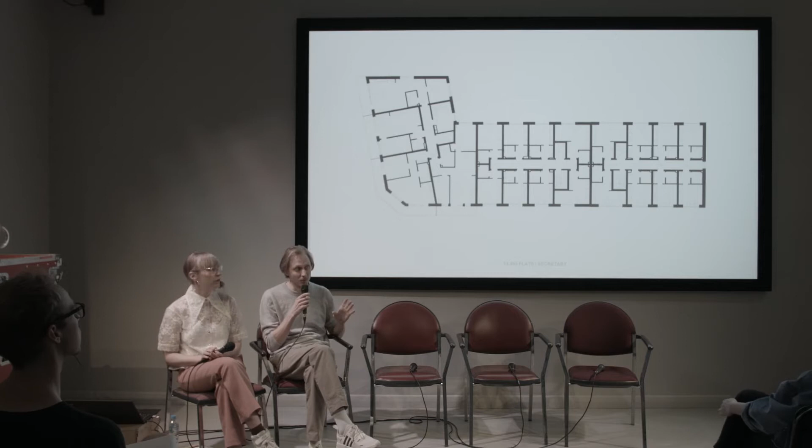We started in 2017. Secretary is a research and development-oriented office, and we try to get that sort of research out into buildings such as this, a multi-residential building for students and older adults in Linköping, and it's being built right now. It's a collaboration between us and two other architecture offices called Sprid and Septembre. It's made entirely out of wood, and it's plus energy.

This is a collaboration we did last year together with Melbourne-based practice Sibling Architecture for the Future Homes competition here. And this is a landscape project for a park in Helsinki that we did together with an architectural practice called Brum. It got pretty good reviews by the jury, but their feasibility assessment team deemed it completely unrealizable, but we're quite proud of it.

And this winter, or summer here, we designed this installation for M Pavilion, which is kind of a sun chair for many people made out of these physiotherapy rubber bands. So the technology used to build bodies is here used to suspend bodies in relaxation or play.

But we also do books, and that's why we're here. So firstly, thank you so much, Matt and Monica, for the possibility to be here, and also for the introduction and acknowledgement of the unceded nature of this land.

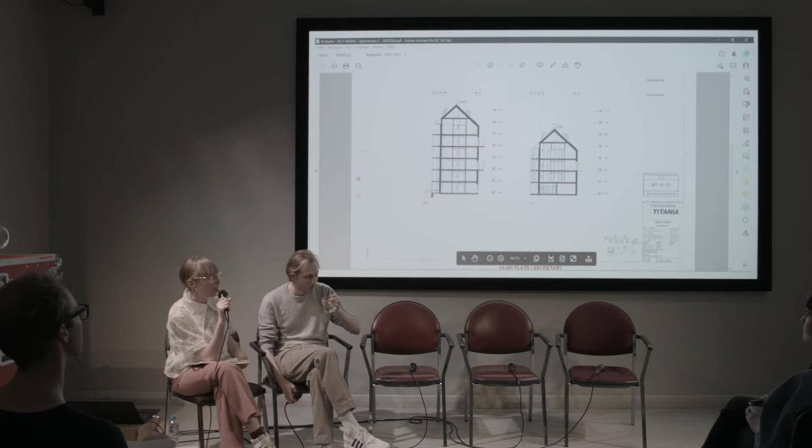We got back piles and piles, digitally, of documentation. But what we were after were the ones that, as you can see, had been scanned with hole punches, that had this stamp of approval. Because a stamp of approval is a magic thing - it means this picture will become reality, that the dimensions documented will become real spaces in the future.

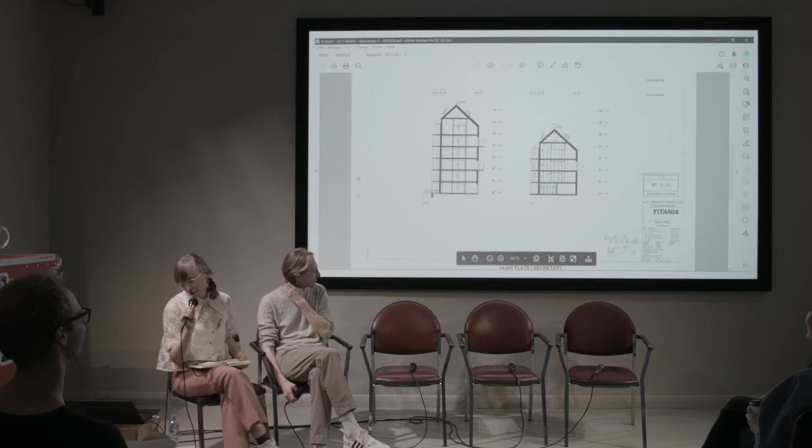So we sat with this material and measured it in Adobe Acrobat. I do not ever recommend this methodology to anybody, ever, ever, ever. Do not ever do this. But at that stage, I don't think there was an algorithm that would have been able to read these plans, because the material was just so diverse.

So we documented quantitative and qualitative measurements. We're not generally a quantitative research practice, so this was very new for us - we had to learn how to do math. Over these late nights and weekends and many weeks, we filled our spreadsheet with 17,000 data points.

And when we went through this pile of material we'd been given, at the end of the day, the 26 municipalities sent us planning permit documentation for 154 projects, within which there were 337 apartment buildings.

It's a little bit of a Swedish lesson here too - you get both languages, the book's also bilingual - which at the end of the day came down to 14,495 flats. If I'm honest, there might be 2 or 3 off there, I'm not sure.

33,000 rooms that would inhabit, if we go with today's norms, around 42,000 people. This is 1.2 million square metres of floor area.

Interestingly enough, it was also the product of the labour of a very limited number of people in one way - it was 38 developers who were responsible for these projects and 88 architecture offices. The Swedish development industry is very heavily concentrated, to the point of almost approaching monopolies.

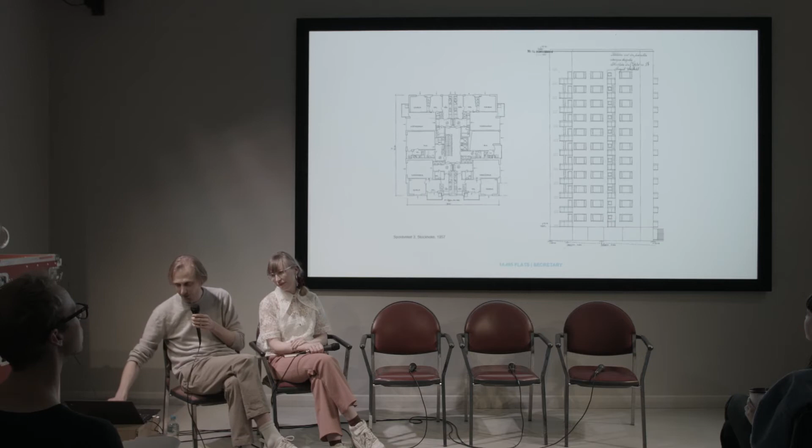These are contemporary examples, and what has happened is that they've become a bit bigger, and they've started to get this kind of bulges. So what was previously a very strict contour and volume is now becoming a bit multifaceted. And if we flip those down, this is what they look like from the side.

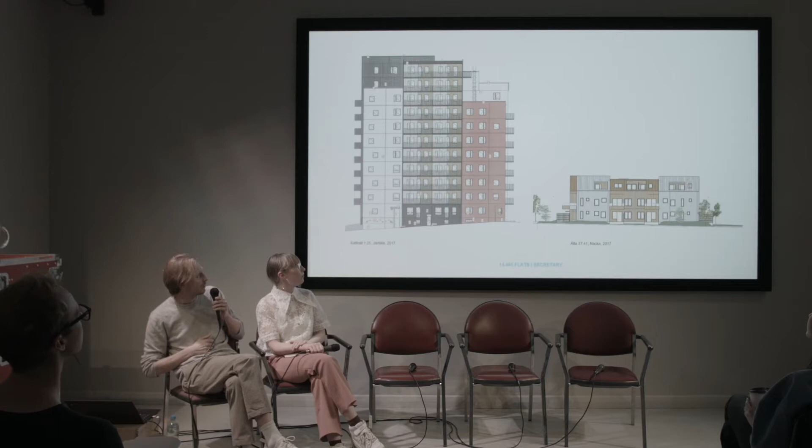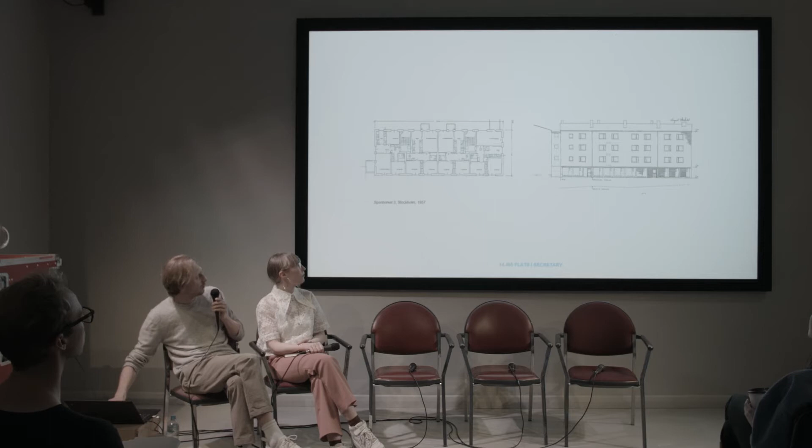So there's also this tendency to articulate a building as if it's made up of many smaller buildings. And looking at the lamellar house, the one to our left here, this is a typical post-war 2-apartments-per-stairwell solution. It's quite slim.

And here we can see a contemporary one. This is one of those 3-apartments-per-stairwell solutions that's so common. Typically you would have 2 apartments reaching both sides, and then a stomach bulge with either one smaller apartment or 2 smaller apartments in. And these can, of course, be longer.

And if we look at this house from the side, it's quite a far step from the old modernist building. We can even see more dense or complex shapes starting to form, like this. And looking at that from the side, it's kind of like a wall of apartment buildings.

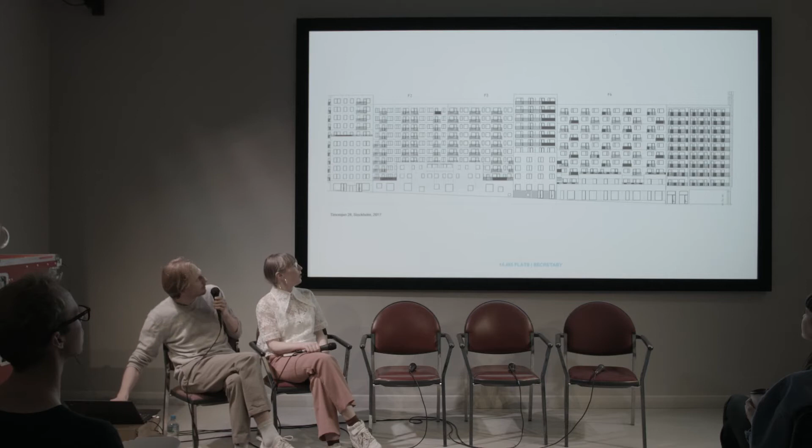And now it's interesting to think that in Stockholm, these kinds of typologies are almost residually produced, like burped up along the streets.

But this brings us to the typological part, and we have 3 typologies we're looking at, or I will show you in this presentation. They range from larger to smaller, and this is the big oldest sibling of them. It's not the most common one, but it's quite indicative of a tendency we've been seeing where buildings start to dissolve a bit in terms of shape and contours. But within the buildings, we can see quite clear and defined stairwell typologies.

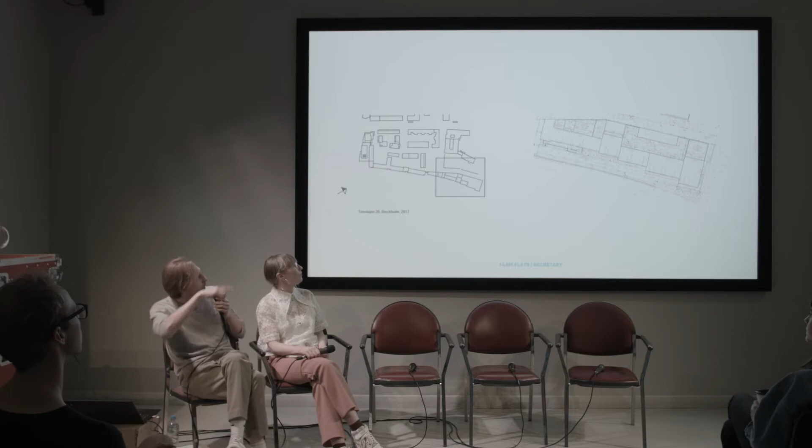This building, which is a very big building, is part of an even larger mega block next to the highway, close to the inner city suburb of southern Stockholm. So on one hand, it tries to produce an image of city—like many projects in Stockholm, it tries to dress itself up as consisting of many small buildings. But it also shields the development from noise, so it also produces this wall, so to say.

This is a typology building that's more centrally located, and it has a weird candy cane shape that makes little sense when you just see it popping up as a plan in a building permit, at 2 o'clock in the morning in Adobe Acrobat.

But if you look from above, you see that it picks up the formal language of the old Olympic Stadium and mirrors it across the road. So in a sense it's one of the last projects from the 80s or 90s, a quite postmodern mannerist take on planning in Stockholm, which is now completely replaced by buildings that try to reproduce an image of a city that looks like a perimeter block city.

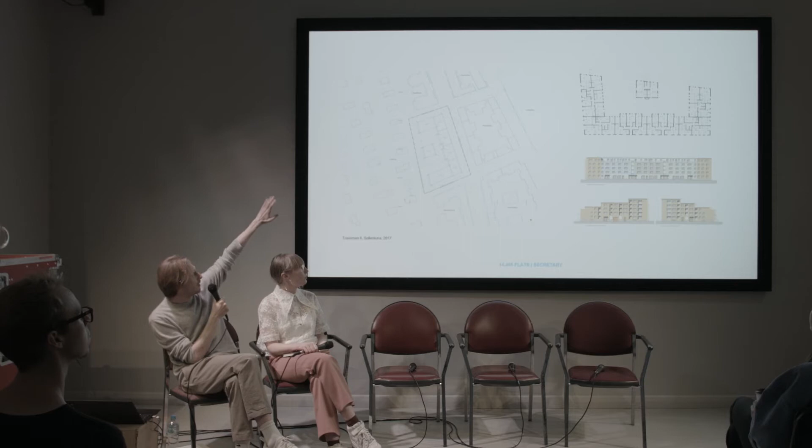But it's produced predominantly in the middle ring of Stockholm, so it has to negotiate this desire to produce a perimeter block city with other conditions. For example, when you have an area of single-family houses on one side and a denser area on the other side.

And they come in all forms and sizes. Because of plot sizes on one hand, and the building systems, the prefab concrete systems that almost all residential buildings in Sweden are built from, on the other, it's hard to produce the closed perimeter block. These typologies form all over the place, and they're interesting because the city actually produced is much more nuanced than the city we talk about. In the Stockholm context we very much talk about either the modernist suburbs, considered low class, or the inner city perimeter block city, considered desirable.

And the reason why you call this the mullet, maybe? Oh yeah, because on one side it's trying to produce a neat streetscape, and on the other side it's a bit freer and flowing.

And the big baby, being the disorderly last child in this gang, there's not so many of them. Out of these 150-something permits, there's about 10 of these. But they very much index a moment in Stockholm where real estate prices have soared to a high enough level that it's now economically viable to redevelop plots designed for single-family housing, but that have a slightly generous envelope around them.

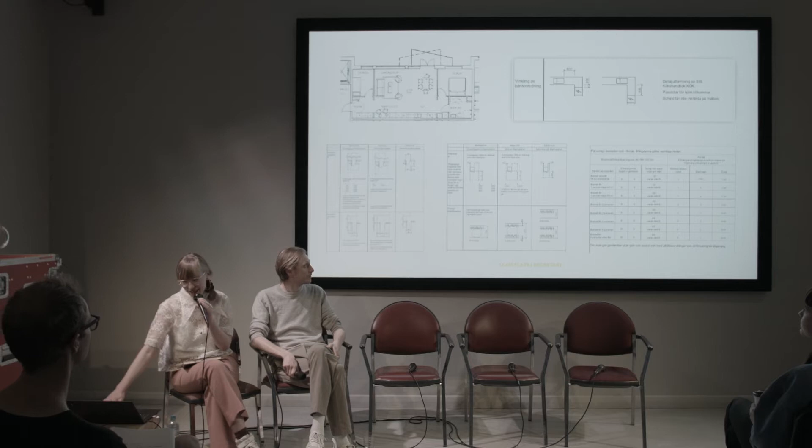It's a really smart result of regulation, of playing with the regulations. If you have a kitchen bench that tries to take a corner, you end up having to use more space. We're at a point of maximisation in apartment designs where even the slightest kink could cost you several centimetres, which would throw your budget off.

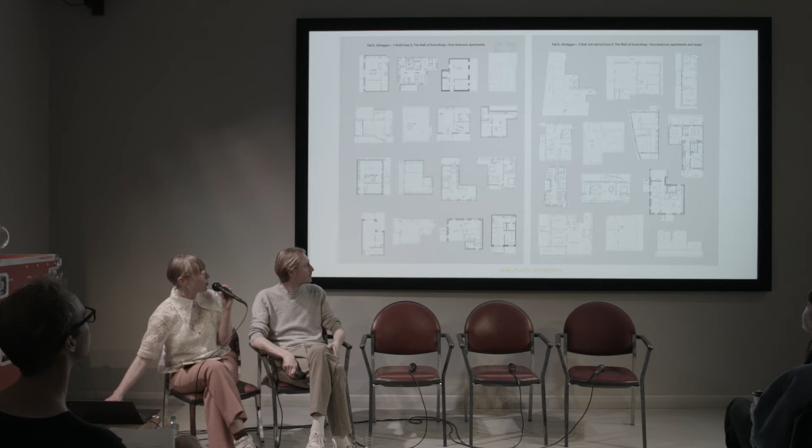Here we see some examples of the linear kitchen, and what it does is reorganise the apartment, often in a tubular form. We see it in larger apartments too, where it's able to connect different spaces. It tucks things away, it's pretty neat, but it also results in an interior that's a little bit like a theatre stage, where everything gets put away at the end of the day, and the living room can then be used potentially for sleeping if you've got a studio apartment.

We also saw some kind of statistical anomalies. The 47 square metre apartment was a very common type, or it's a statistical mean actually. When we look at what it does, here's a bunch of them. You'll see we've been careful to pull out our examples without naming or shaming particular architects, also because in a way these are very good solutions to the problems posed.

The thing with the 47 square metre apartment is you really have to choose what you're going to do with your life. We can't see everything here, but you get the idea. You can sleep in this apartment. You can put your child in the walk-in closet. You can also store your winter tyres and ski gear in the closet with your child. You can use the bathroom, and you can cook for a limited number of guests who can sit around a very small dining table. What you can't do is have a hobby that isn't on your computer, which wouldn't be a problem for Rutger.

You cannot build anything, you cannot make a mess. You cannot have a friend who comes and stays. You cannot have relatives who come and stay. You cannot have a housemate. You cannot have a messy life. You cannot have a lot of things. You need to be a fairly organised person to live in these spaces.

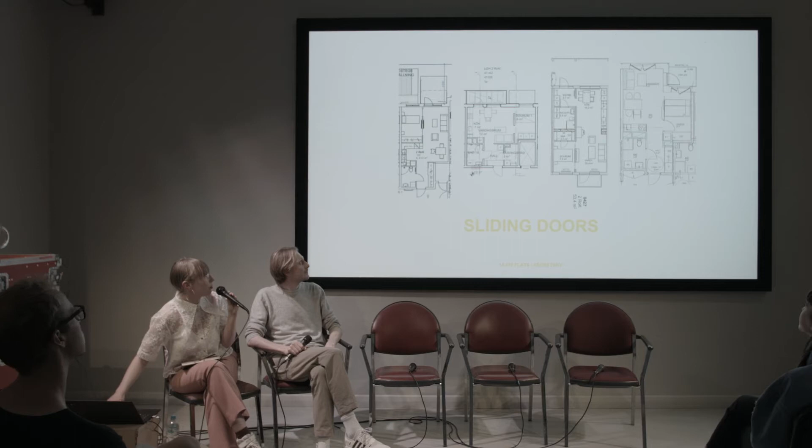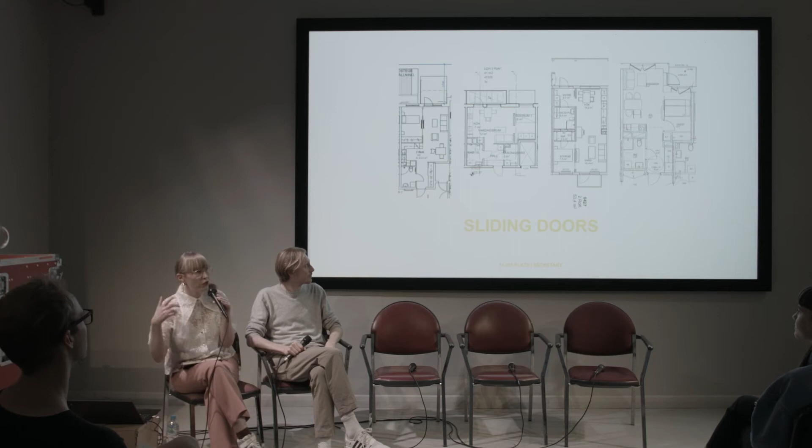So we see these regulatory gymnastics coming to quite extreme limits. Here we have bedrooms where the bed is accessed via two sliding doors, so you have to walk around the bed into the living room to change sides of the bed. Changing sides of the bed isn't something we all need to do often, but if you're ill and need a carer, this is something your nurse would need to do. So, in fact, this is really pushing against our disabled access laws.

So, to sum up this kind of interior analysis, as we were sitting going through these plans, we spent a lot of time at the office and started to talk about them in terms of who sleeps with who. You get bored after a while in this kind of study and start to imagine who may be sleeping with who in these imaginary apartments. But beyond the joke of trying to make up sleazy romances based on 14,000 apartments, there's also a question of what kind of life is really facilitated when we choose architectural norms that become so heavily entrenched that there is no deviation from them.

And in these images, you see a range of different larger apartments, and I won't go through each of them in detail, except to say there's a general tendency toward a master bedroom and two smaller bedrooms, which are clearly for children. The only possible alternative is one of those smaller bedrooms being located near an entry, so it could be used as a study, and those would have been the apartments that increased rapidly in value over the last two years because of the pandemic.

So we did a final run through of our data, trying to look for apartments that would have two rooms that would support two double beds, one double bed in each room, in a desperate attempt to find a kind of co-living model. And we found 32 of them. That is 32 instances in our entire data set that would support living together with someone who is not your child. And that's pretty concerning, actually.

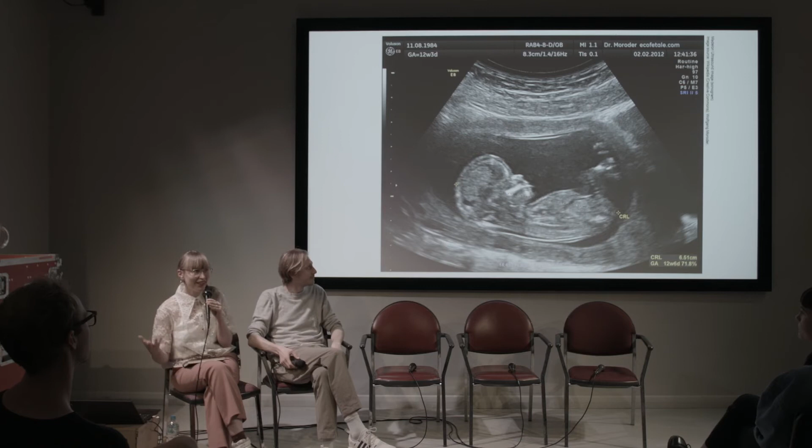And so these politics really come down to what we as a society believe is okay, reasonable, adequate, or in fact better than okay. What we've tried to present to you in this very short run through of the book is the idea that architecture is a production of a future. And I think in that we see a very optimistic and affirmative role for the discipline, but also that architecture sometimes doesn't feel well, that it is sometimes racked with anxieties, that it is asked to do very, very many things for very, very many people. And as a result, architecture at times can be evidence of a kind of collective nervous breakdown.

We've also kind of posed to you this idea that maybe beyond the glossy best practice example that we see in our magazines, in our architectural discourse, the individual building might not be so interesting compared to its fabulous alternative, which would be the composite beast.

And at this point, I guess this is my last slide, but given that we did this project over 3 years, now these buildings are built. Now, in 2021, 2022, they're inhabited. So now would be the time for a kind of post-occupancy study. Now would be the point at which this would become not a projection, but archaeology. And so I hope that archaeology might be a theme that we can return to in the discussion.

But hopefully that gave you some insight into the contents of our book. And I'm very much looking forward to discussing it with our guests in the second half of this session. Thanks so much.